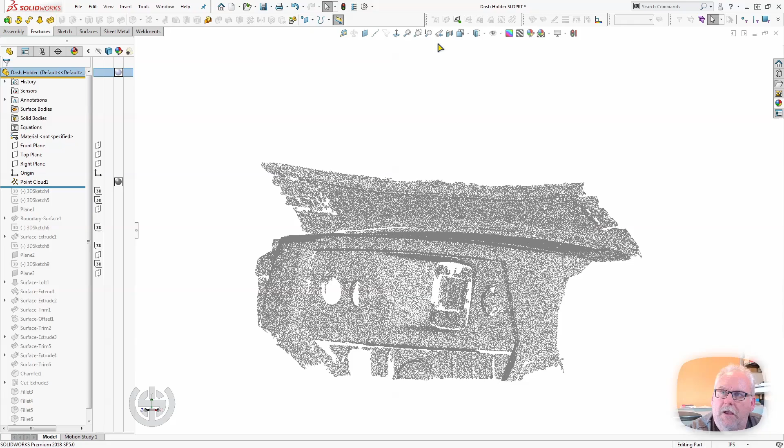And so what we have here is we have an aligned point cloud, and like I said, I did that in Cloud Compare. I'll show you the front view.

So that's essentially the front. I actually think I aligned it to this corner and this corner over here, and I think the crown is somewhere right in here.

If I go to a side view, you'll be able to see that the windshield is skewed slightly. I didn't mean for that. So this right here should look more like, let's see, can I get it? Should look more like that.

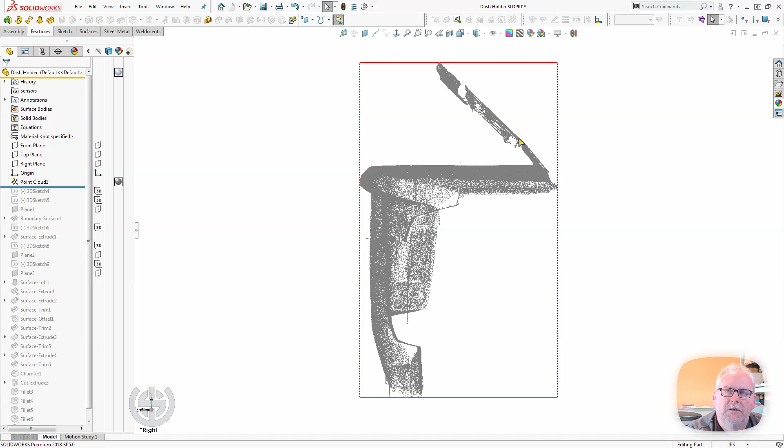So this part right here should literally be, since it's a scanned face, should be like one line thick.

If you've ever used alignment software, it kind of sucks. I think, I don't know why I think this, but I think that I'd have to go back and do some research.

I think that Fusion 360 is what a lot of people use. I don't know what the best way to align a scan is to an XY coordinate system.

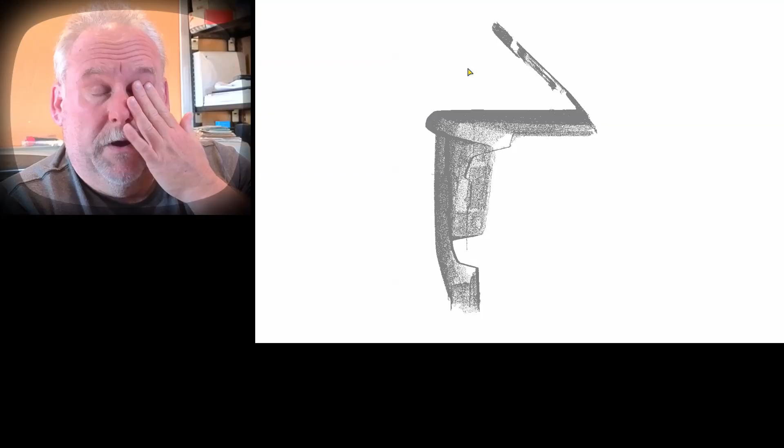There are a number of probably very robust packages like Geomagic, or there's some other ones that aren't coming to mind right now, Geomagic Design X, and that may do a better job of aligning. So normally what I would use is a 3-2-1 alignment, or I would align it by 3 points.

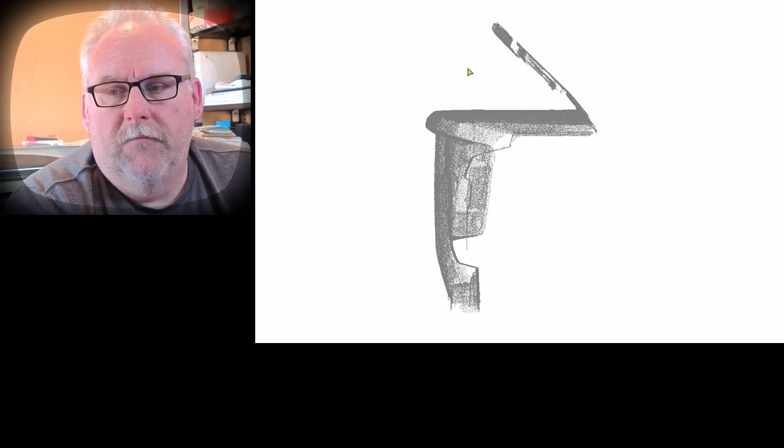So this isn't perfect, but if I go back to the side view, not the front view. We'll go back to the side view. You can see that this essentially is straight across right here. And we'll look at the sketches here.

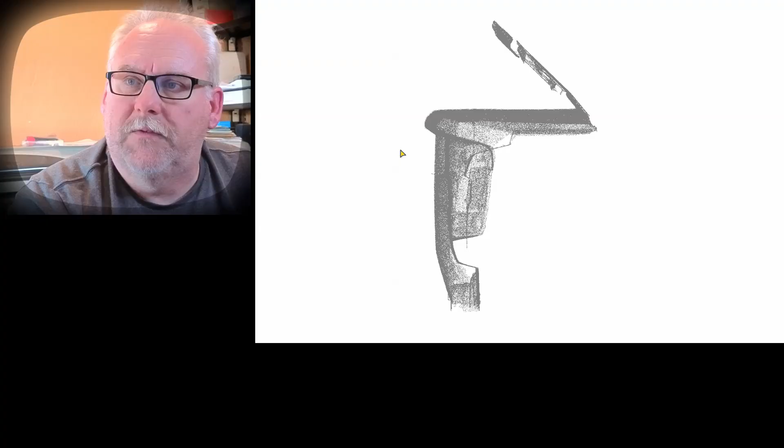So in SolidWorks, if you've got professional, you can get this thing. Let's see, do I have it turned on? Add-ins. Scan to 3D. I'm not going to go into it, but essentially what you can do is insert it. Where is Scan to 3D at? Tools. Scan to 3D. You can do a curve wizard.

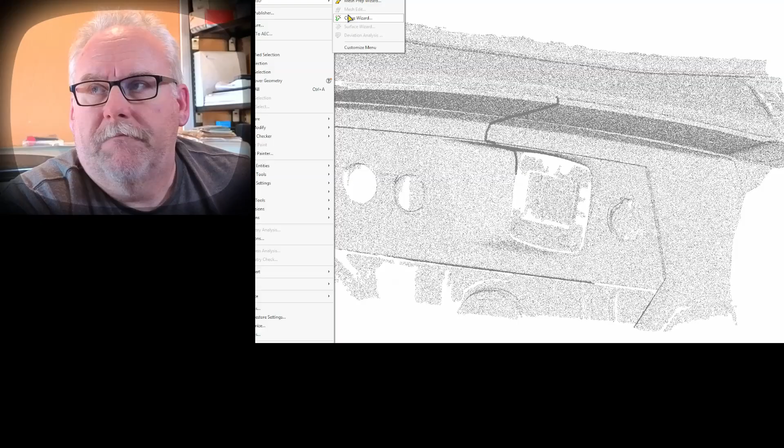I could have also done a surfacing wizard, I found out later, but I just used the curve wizard, which generates these splines. So this is actually a generated spline right here. When you do the scan to 3D, you can use a plane as a sectioning tool, and it'll fit a spline to the... excuse me, I ate sardines.

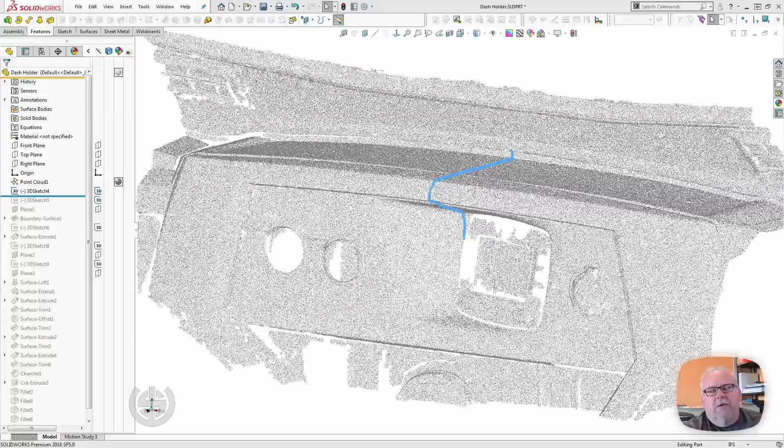It'll fit the spline to your point cloud, and basically you can give it a tolerance of how many points away from the median or the midline that it references. So I always set mine down around 0.01, so 10 thousandths. Is that right? 10, 100,000. Yeah, 10 thousandths wide. And I think what it does is it takes all the points within 10 thousandths and projects them into the plane that crosses. At least that's what I imagine it does.

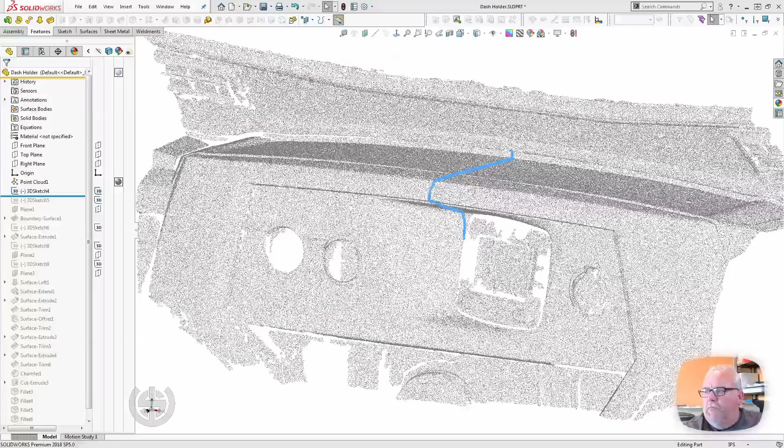So I tried to put one right at the crown, and this is an actual spline that's been pushed into a 3D sketch. And then you can see this one here is also a sketch across the top edge of that face. And you can see right in here there's some type of feature that dips back up. I'm more or less trying to create near surfaces, right?

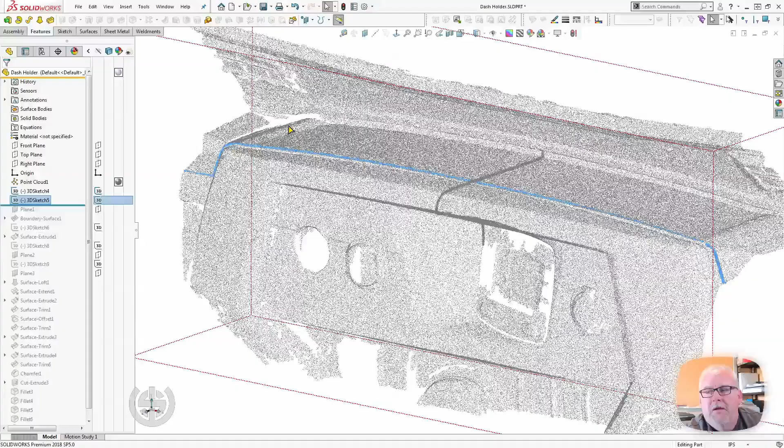Again, this isn't Geomagic Design X. I'm not going to get an actual surface. Now, I did find out later I could have generated surfaces. So there's a couple of caveats here.

If you're doing this, when you create a sketch, the first sketch you create that you put dimensions in, when you put your first dimension in and it scales, you undo that. So let's say you go to dimension something and it says it's, I'm going to say it's 15.5623, right? It's just over 15 and a half. And let's say you want to constrain whatever it is down to 15. It will scale the whole thing.

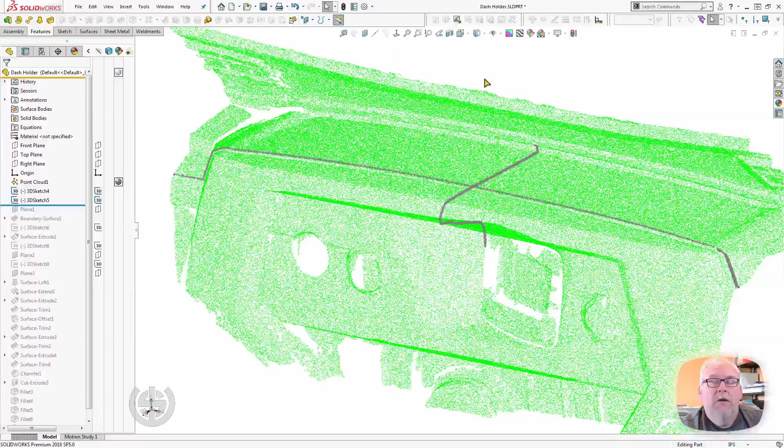And I believe it scales the point cloud as well. So what you would do is you'd undo that - you'd Control Z right after that happens. And then I believe you can edit that dimension without it scaling.

And there's some other things that you can do that will move your point cloud down the feature tree, and you want the point cloud to stay at the top. So I don't know what causes that behavior, I forget what I did. I did something, interacted with the point cloud, and SolidWorks moved it to the bottom of the tree. So we're going to move on. I'm sorry that was so long.

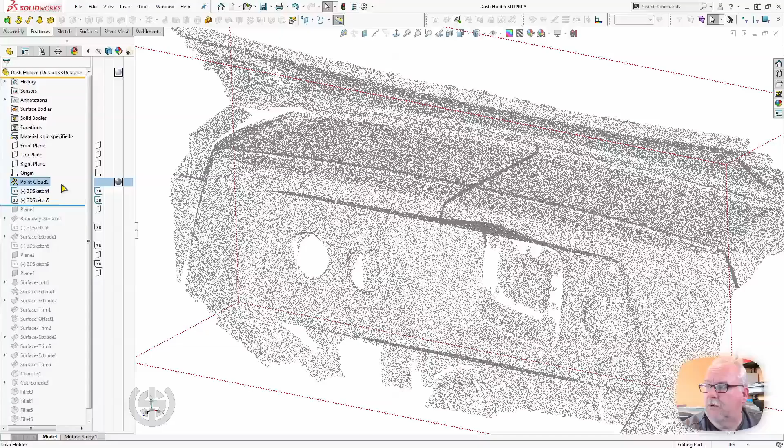So then I generated a plane, and the plane was right on top of that sketch. Did I even need that? That plane may not be used. It says it is - okay, so I generated a boundary surface.

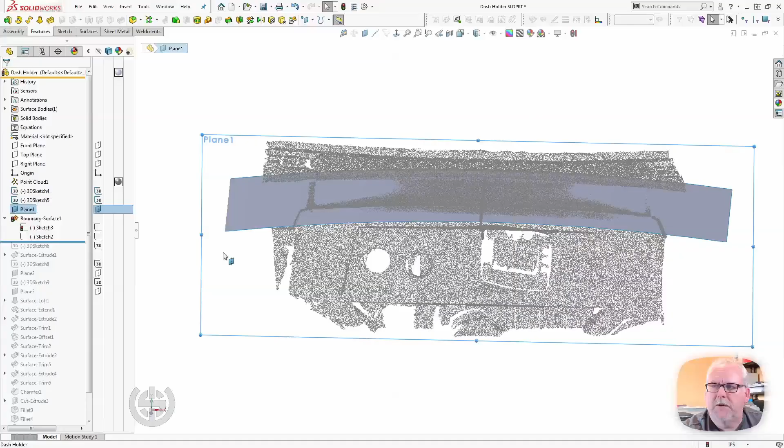All right, so you can see right here where it's not quite matching, so my surface is high. I generated a boundary surface. So what I did - this is a straight line that intersects. In fact, I'm going to turn the point cloud off.

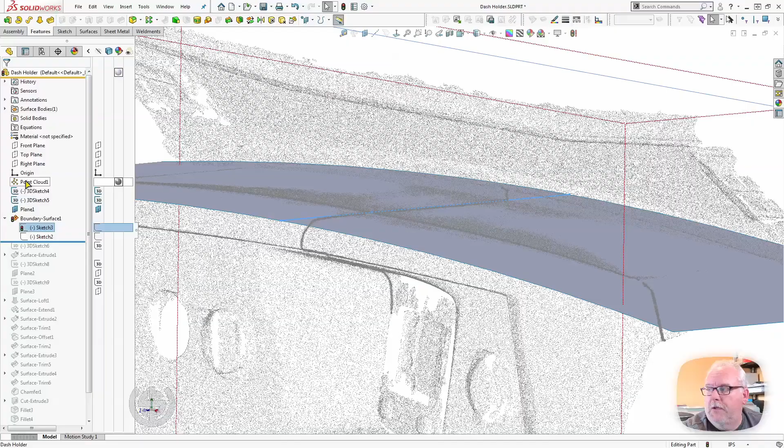By the way, you can only turn the point cloud off - notice how there's no way over here to do it. Nothing to click, right? So the only way you can turn the point cloud off is to hide it in the right-click menu. So again, I would consider that a flaw. Probably has something to do with 2018. With the way SolidWorks is slow about things, I'd be shocked if it was fixed in 2025, but maybe it is.

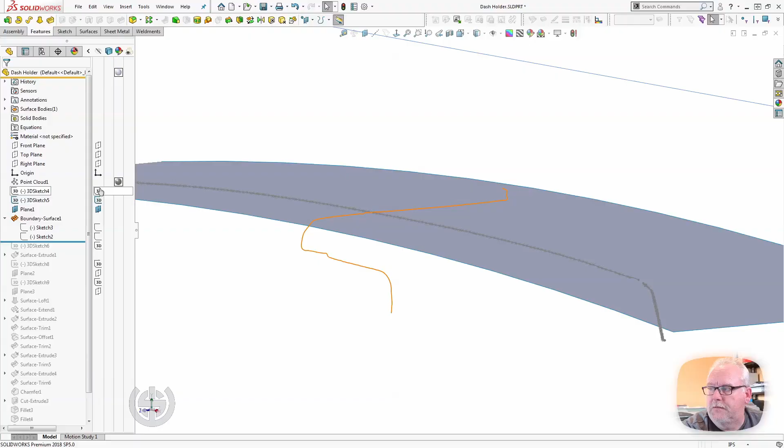So we're going to actually turn off these two 3D generated sketches from the cross section, and we're going to have a look at what actually generated this surface. So that's literally a straight line, and this is a curve. And so it generated this face, right? It's a symmetric face across this line here.

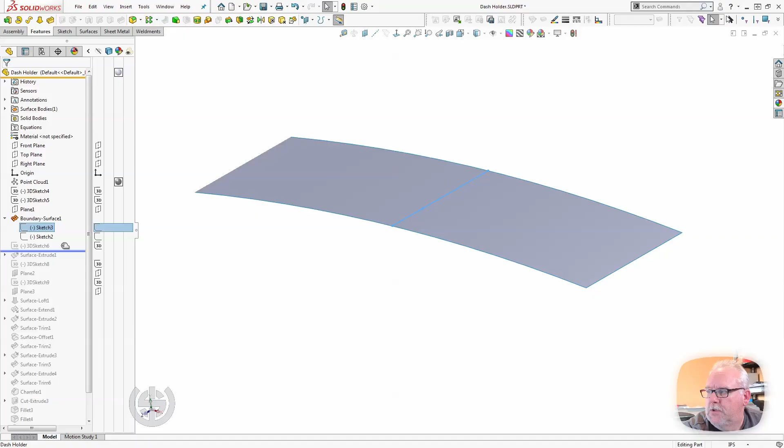I probably could have lofted it - there's a couple of ways I could have done it. I chose boundary surface. So then I'm going to turn the point cloud back on so you can see what I'm doing. So you can see the surface is high here, but I'm generating something that's going to be using double-sided tape, so I have a certain amount of thickness that I can sort of fudge factor.

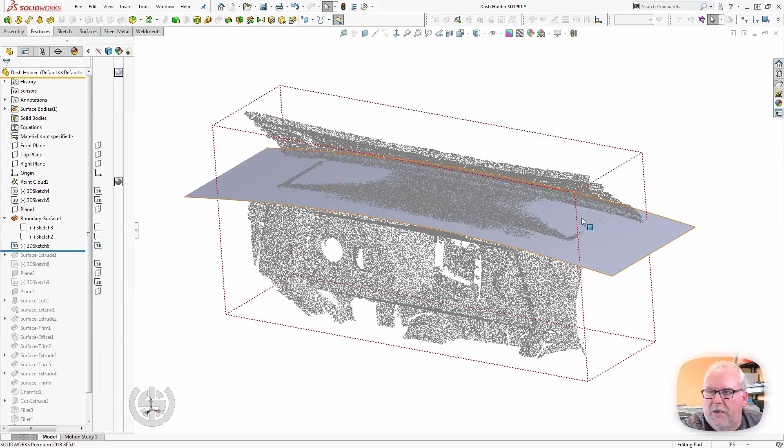Because it turns out the windshield is not actually the face of the dash.

I'm not used to doing this. So the face of the dash, actually I can point to the video here. That makes more sense for you guys.

The face of the dash isn't planar to the windshield. The windshield actually runs off that way, with this side over here being further away compared to this face across here. I only found that out at the end.

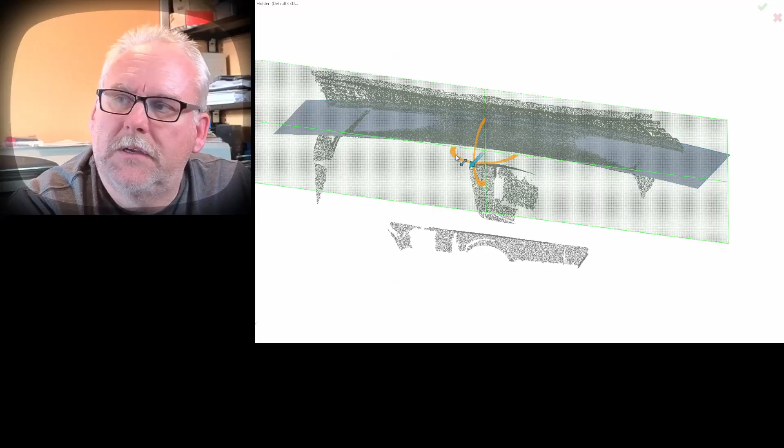Can I show you guys? I'll try to show you. Let's see, does that work on the... Oh, it actually does. Okay, good deal. I'm glad that works. Escape.

Let's get back to that. So there's my first surface. This surface here would be for the windshield. This is the one, you can actually see it right there. I just generated another line off this 3D sketch right here.

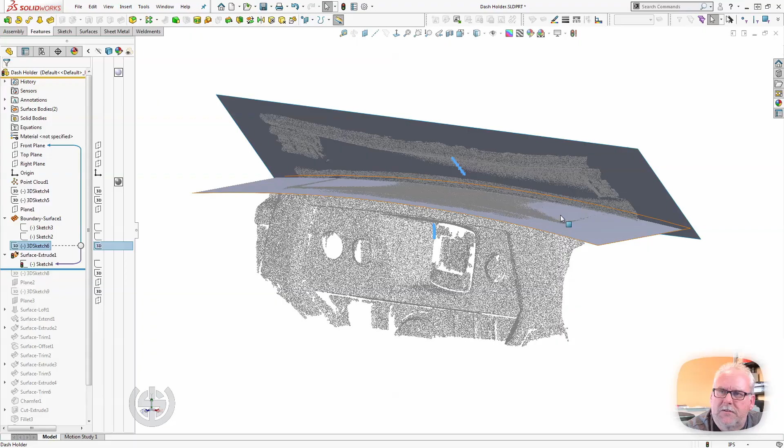So this sketch came from the scan data. What you can see in this image, in all reality where this comes from, see how this surface is out towards us.

This area right here is towards the screen. This area over here is actually on that side of the windshield.

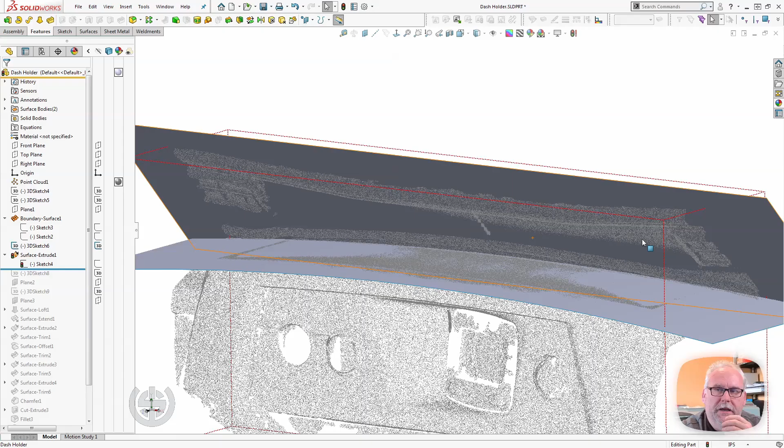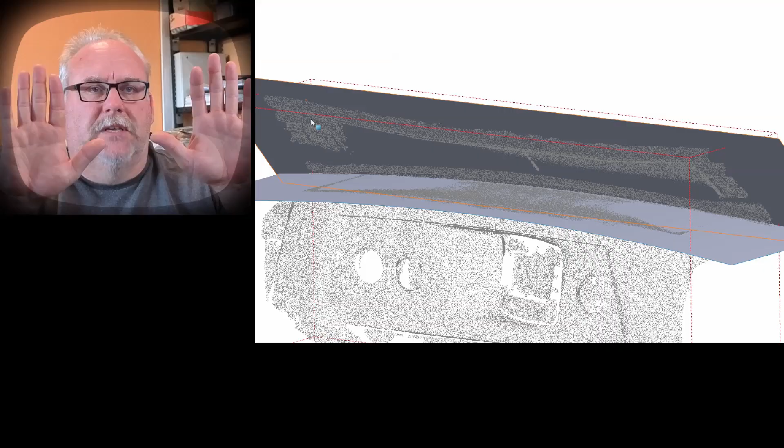The scan itself is tilted away like this. So if you watch my cursor, this area here is actually away, meaning I have the scan tilted slightly one direction. I wasn't able to get it perfectly lined up.

And that's what I don't like. I wish there was some alignment software where you could pick a face, align it in one direction, and then lock that axis. You can kind of do that in Cloud Compare, but I'm not an expert in Cloud Compare, so that's part of the problem here, but we'll get back to this.

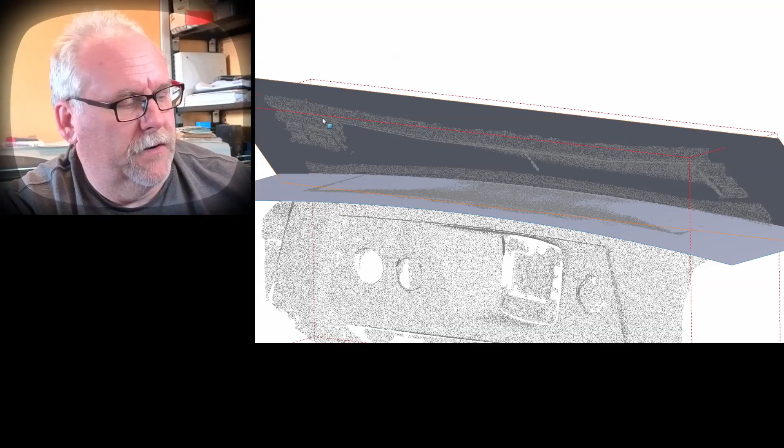So windshield, right? Two surfaces. These are all going to be to construct that front face there. You'll see here in just a second. So you can see these two sketches here.

And if I look at it from this direction, you can see that it's curved right here. This has got a significant amount of curve across this face.

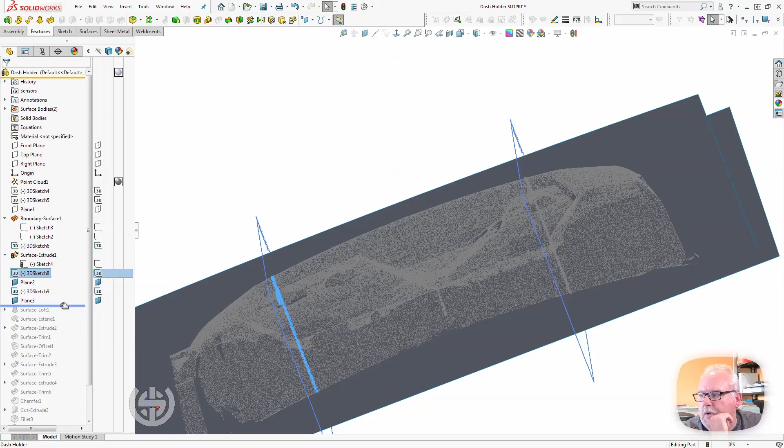So, did I combine? Is one of these combined? Sketch 7. Where did 5 come from? So sketch 5 in the middle there is generated from 3D sketch number 4 up here. So that's my midpoint.

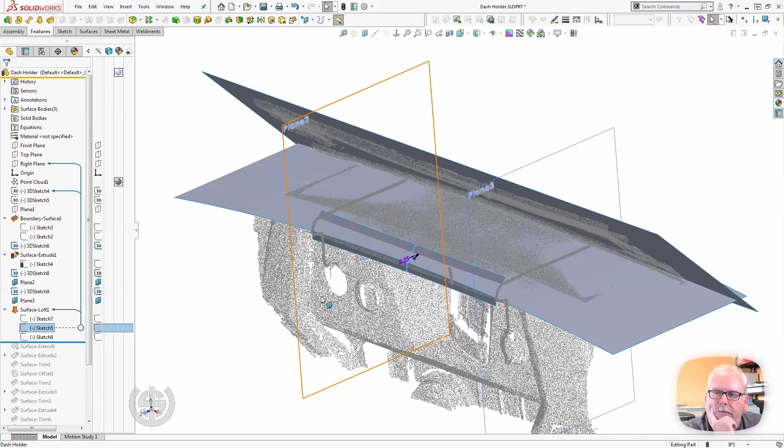The dash doesn't have symmetry. That face there is actually canted, I believe. I'm pretty sure it is. I don't think it has real symmetry across this point right here.

So let's get back to it. Surface loft, and then I wanted to get this loft out to the edge here so it would cut well, so I surface extended it right through the ends there. You can see we have 3 surfaces so far: kind of the front edge of the dash, top, and then windshield, which is a plane.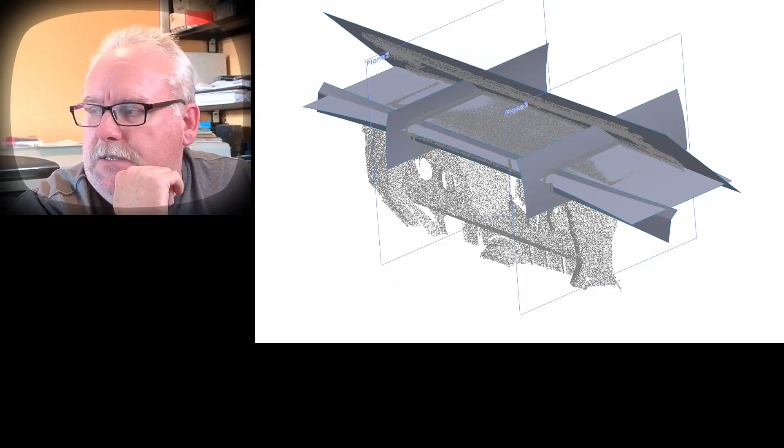So let's see, what else do we got here? Then I generated some sides. These literally were artwork. So if I go into the sketch itself and we have a look at it, let's get you guys back here. So you can see that this is just an arc.

It has a 10-inch radius, and I just generated some numbers to get the sides. So if this is my origin, it's 2 inches up, 4 inches down. So I would call this arc, and it's 6.5 inches here and 6 here.

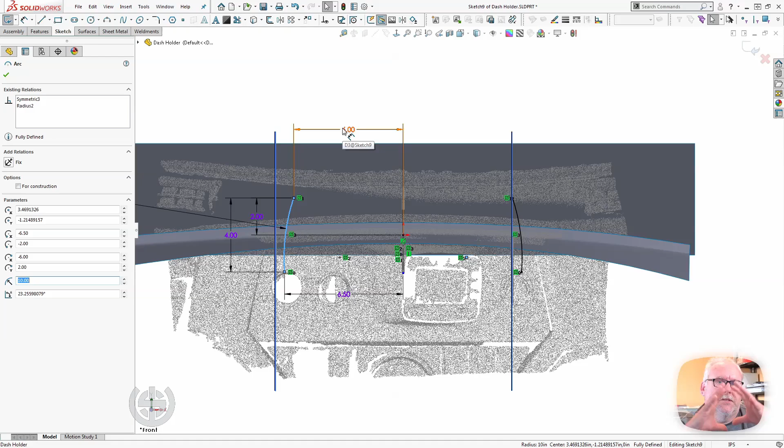So in this particular case, this is just a way to get these kind of Darth Vader edges that encapsulate the surfaces. So we'll go ahead and exit out of there. You can see those surfaces go through both sides, through all the surfaces. And if you're not used to working with surfaces, this is going to sound like gobbledygook to you somewhat.

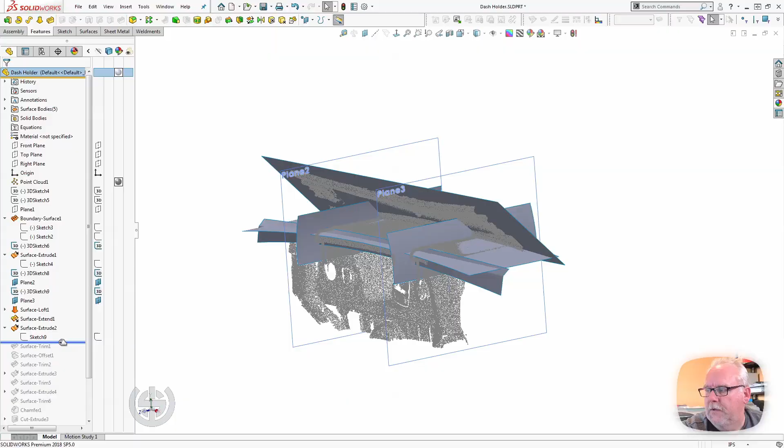So then I did a surface trim, and I trimmed off everything. Why is it not showing? What's going on here? In fact, I'm going to get rid of the point cloud at this point.

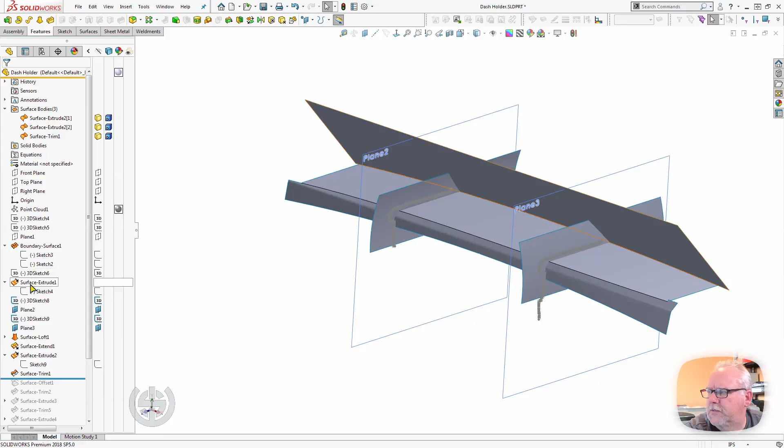And we're going to get rid of that. And we're going to get rid of, what else is showing? This, and that. Okay, so the first trim, let's undo it.

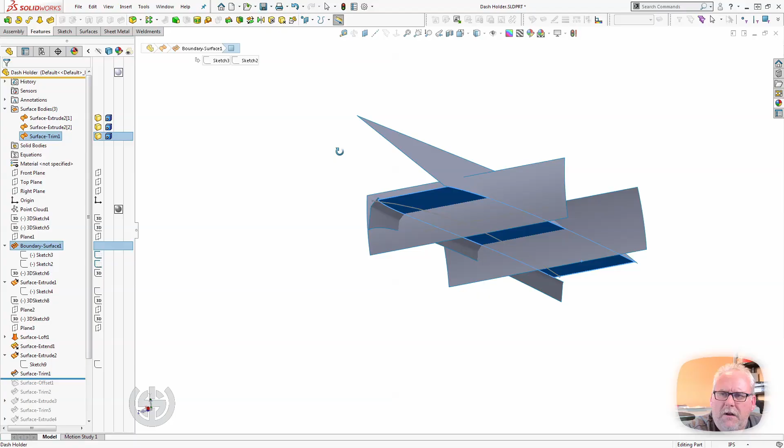You can see I just trimmed these two together. So this surface and this surface are now joined. And there's all this overhanging geometry that you can just ignore, like this piece here. But the next offset, so the reason for the offset, so you can see what I did here. Let's get it so you guys can see it carefully.

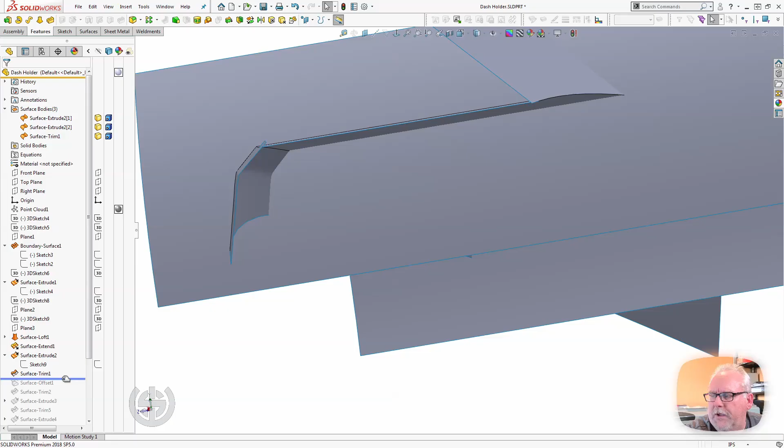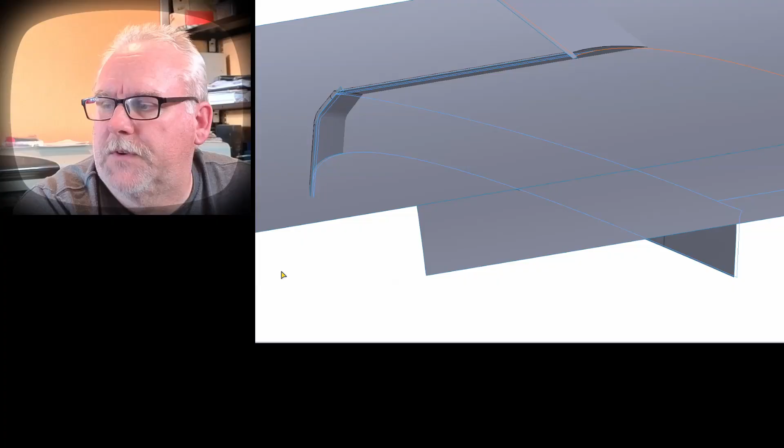The reason I did that offset, I'm going outward. Think of it like clearance between the dash where the double-sided tape's going to go. So surface offset for the tape. And then I'm going to actually hide this inner surface because I don't need it anymore. I'm just disregarding it. There's all this extra patchwork here that I don't care about. It's going to go away and get trimmed.

So my next trim trims off everything inside the two Darth Vader wings. And these basically are acting as trim. And I trim now this surface, so all three of these surfaces are joined together by the trim function. Then I'm going to extrude something. What am I extruding here?

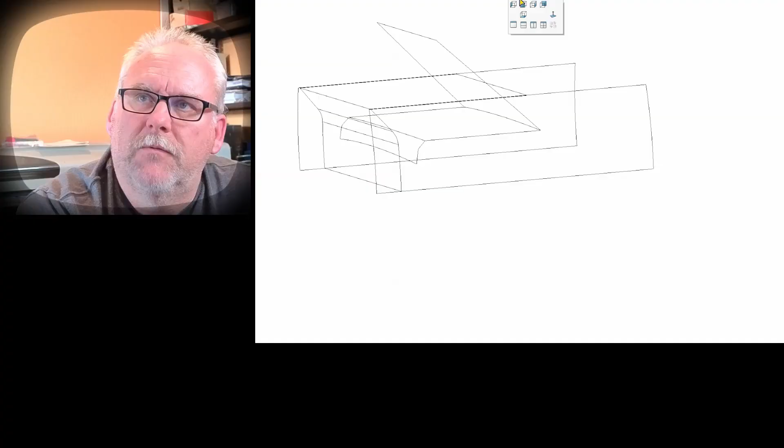Okay, so with this extrude I'm starting to now form, we'll go into a see-through view here, and we'll go to a right side view. So this surface extrude here, surface extrude 3, is forming the top of my tray. So if we have a look at the sketch, all this is meant to do is make the top edge of the tray. You can kind of see what it formed.

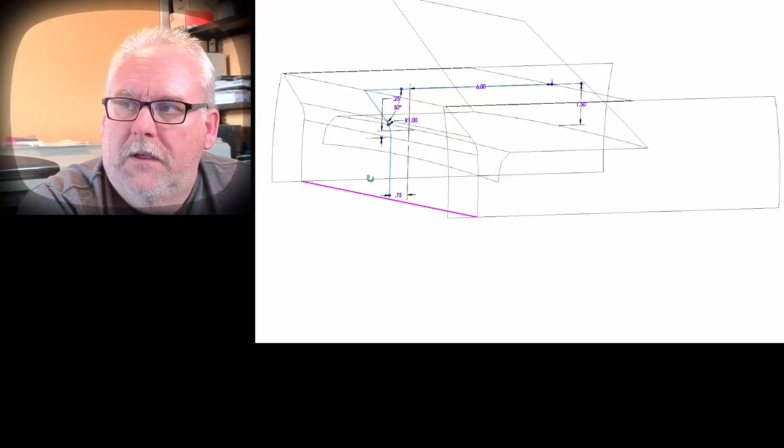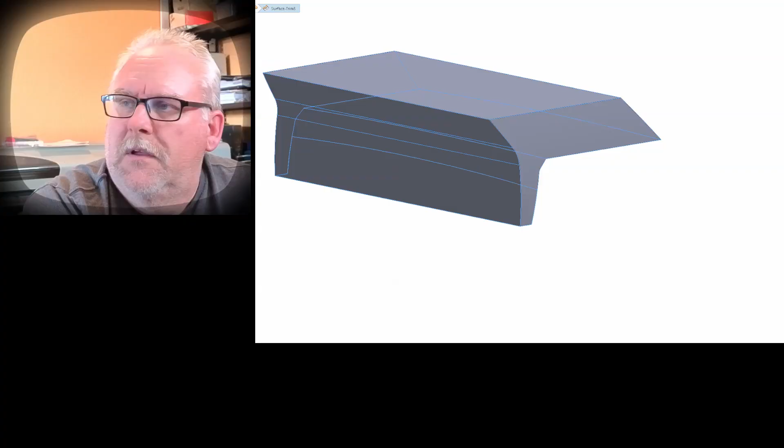So we'll go back to this view, and you can see that I basically just put a front. This is a separate surface that's on the front here now. So in this trim operation, I trimmed everything out. If we have a look at what I trimmed, all the stuff that's transparent is what I trimmed. So I did a mutual trim. This is all my surfaces that were included in the trim command, and then these are all the pieces that were trimmed out.

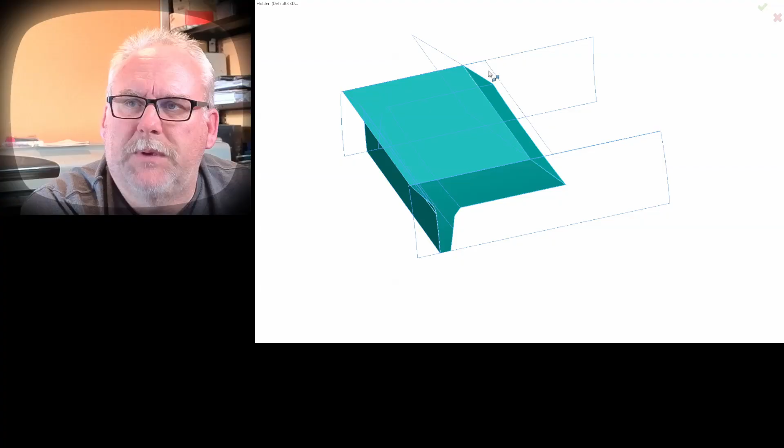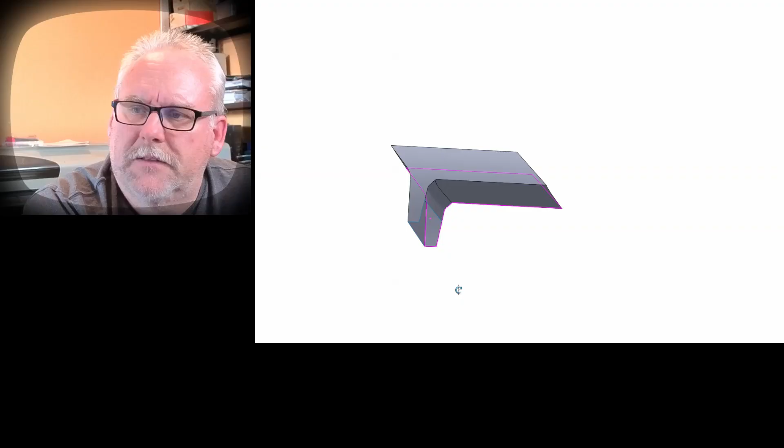That one and these two back pieces and this piece right here and these little wings up front. Did I get a solid out of this? I can't remember. Let's see, nope, I've still got two surfaces. That's because I've still got an open bottom right here. So you can see that that's open. So I have a mostly watertight model, but not a complete watertight model just yet.

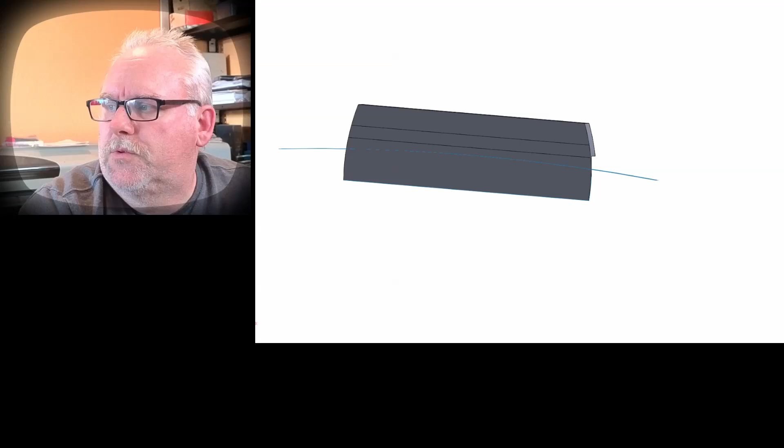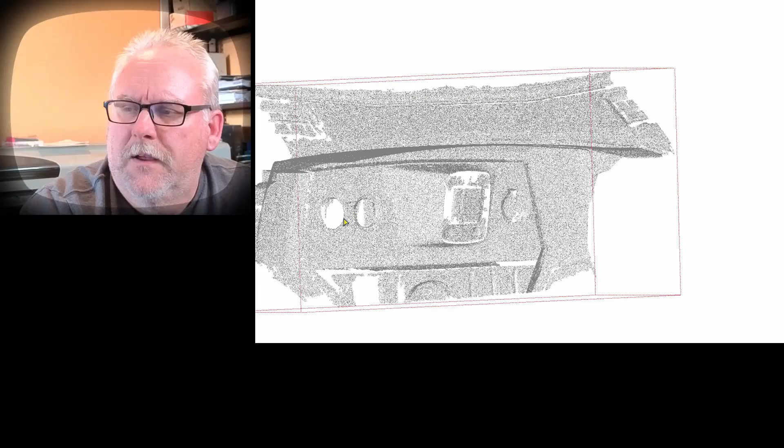So then I did a surface extrude, which was just an arc across the bottom here, and coincidentally, it matches up. It's hard to see it, but let me actually turn these off for a second. So you can see this shelf right here, this indent. The radio right here, some charging buttons, and it's inset. So I made the trim right across the middle of this face right here.

So we'll turn these two back on, and we'll hide the point cloud. And then I'm going to use one more trim, and I think I'm getting a solid out of this. I am. So we now have a solid body. This body can be ignored. In fact, that should be deleted. So on this surface trim, there was an option to create a solid right here. Sorry, guys. I should have had this open.

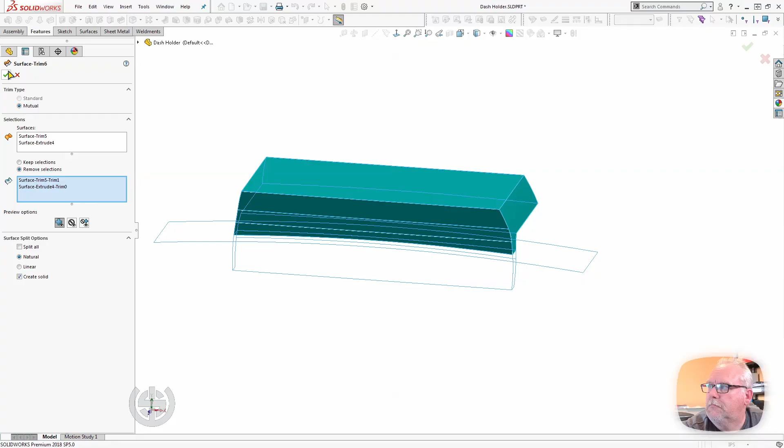So you can see right here, create a solid is here, and that's what I did. This was just to trim off that face along that edge that I was hopefully showing you guys. Gosh, it's hard to remember to switch back and forth between the different views when you don't do this a lot. So then there's a chamfer right here.

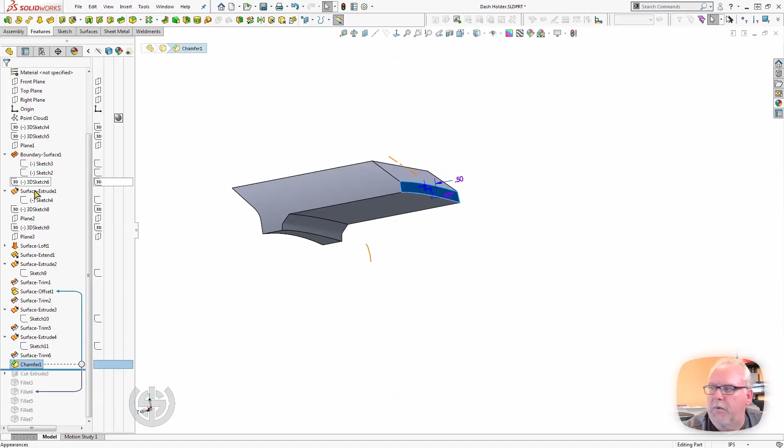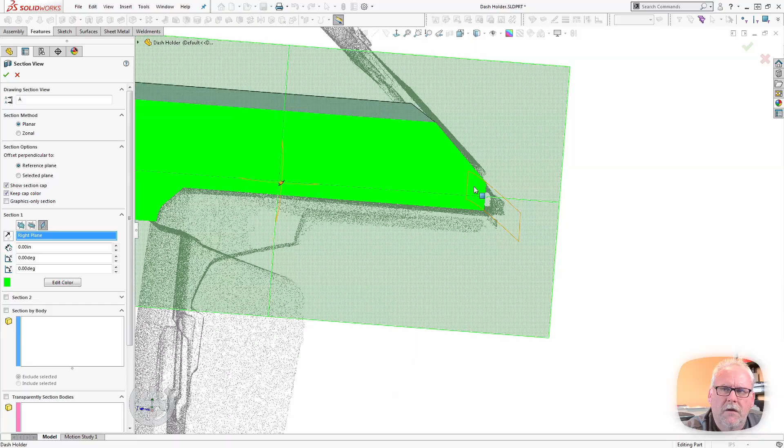The reason for the chamfer is that it clears the rubber on the windshield. Again, we're going to turn the point cloud back on. And if I section this, you can actually see that right there it barely is going to touch the rubber. But if I roll this back, the idea is that chamfer is meant to clear the windshield rubber, and this little bump out right here is the rubber protector that goes around the windshield.

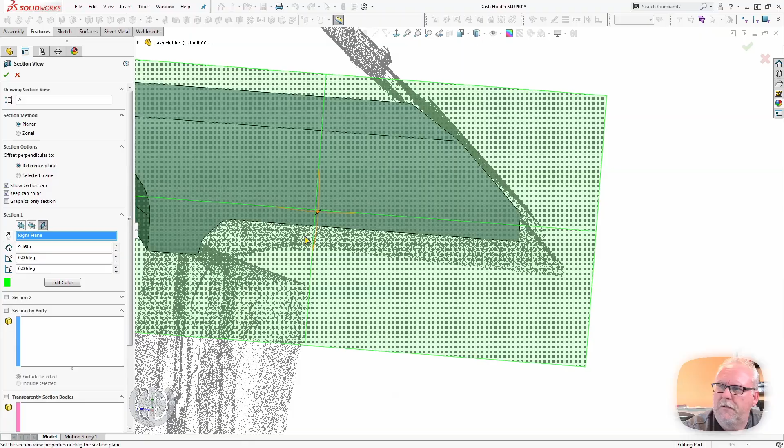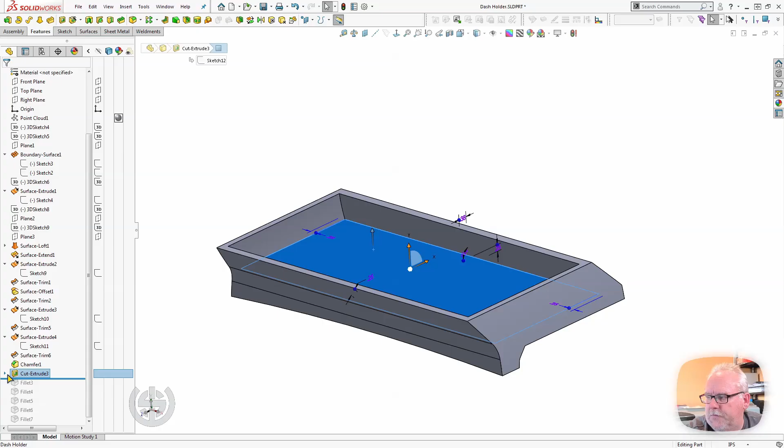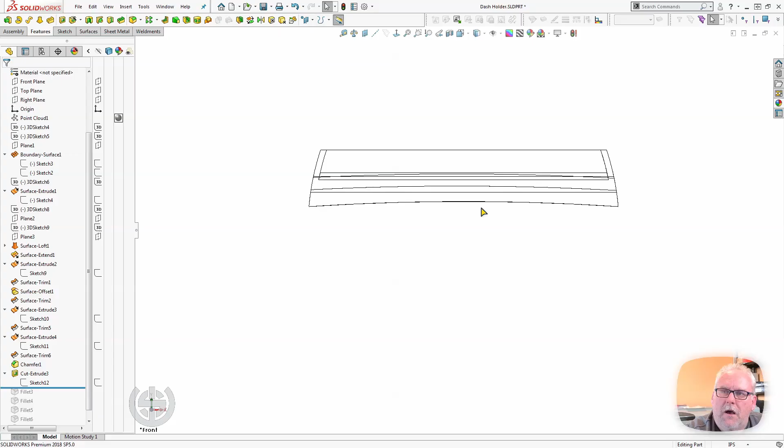We're going to turn off the point cloud again. At this point we have this solid, so we can start treating it like a solid, something you're probably all familiar with. So I did a cut extrude here from the top view, so I'd get consistent wall thickness. We'll actually have a look at it from the side. It's thicker down here and thinner up here, but on the front here it's consistent wall thickness. And then if I go from the front view, how would I show that to you guys here?

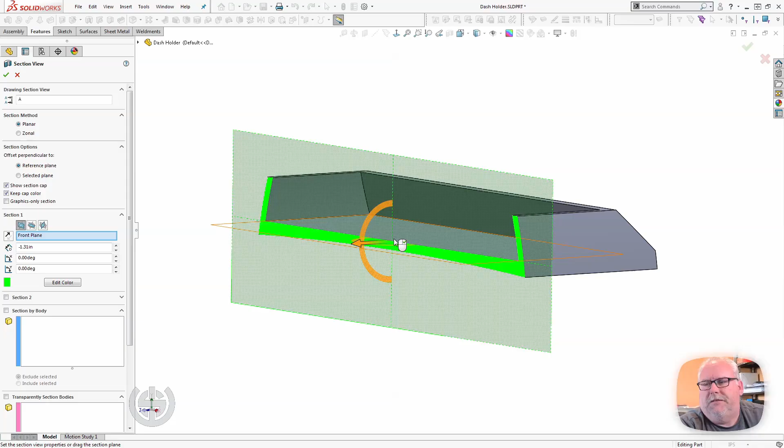You can see when I get back here, I have a thin point right here. So my thinnest point is 1/4 inch. And I believe the walls are 1/4 too, or maybe it's 3/8. You know, this is all 3D printed plastic, so I don't know if this is going to hold up or not, but I figured it was worth talking about because some of you might want something like this.

And then obviously you do all your filleting, if you can help it, at the last. So I filleted the inner pocket, inner wall. What did I do next? I filleted the sides. Order matters on these fillets, or they'll roll around. Like at one point I had filleting rolling around down here, and that would have undercut where it touches the dash. You want it to have a square sharp edge, so there's no undercut at the dash. So filleted these two faces here and filleted this back edge here.

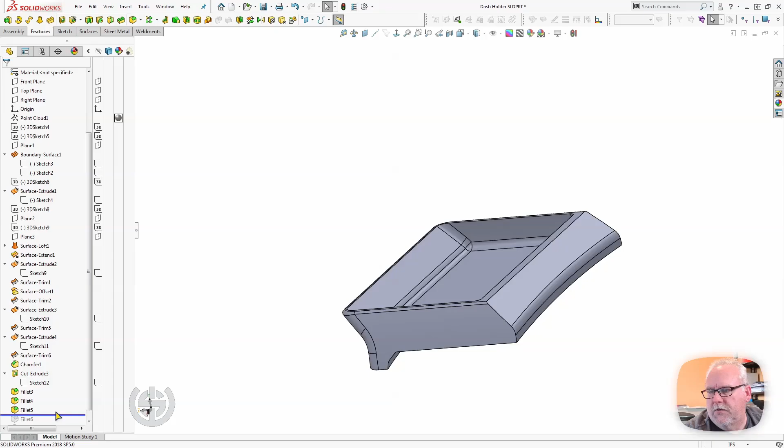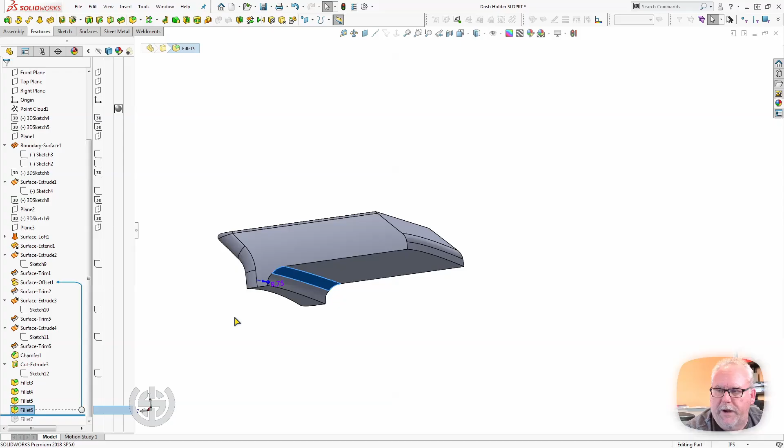And then let's see what I do after that. What's that fillet? I think that fillet runs around the top, but it doesn't. I didn't fillet it back here where it's close to the windshield. So let's see. Yep. So filleted that edge. And then what's one of my last features? What's this fillet? Oh, this fillet is where the breakover for the dash is right there underneath. And then what's fillet 7? Fillet 7 is to soften that front edge.

So one of the things I thought about doing is making this stick out a little more. What I thought about doing was making a pocket right here. And the reason for that is you'd be able to have maybe weep holes that came out the corners. So for water, you'd have water shedding or dripping here. I also imagined that you might be able to stand a phone up if you made this tall enough. You might be able to stand the phone up vertically, so your phone would be like this.

I don't actually think that, you guys like my mouse skills there, I don't think that's going to work. I don't think it would stand up vertically.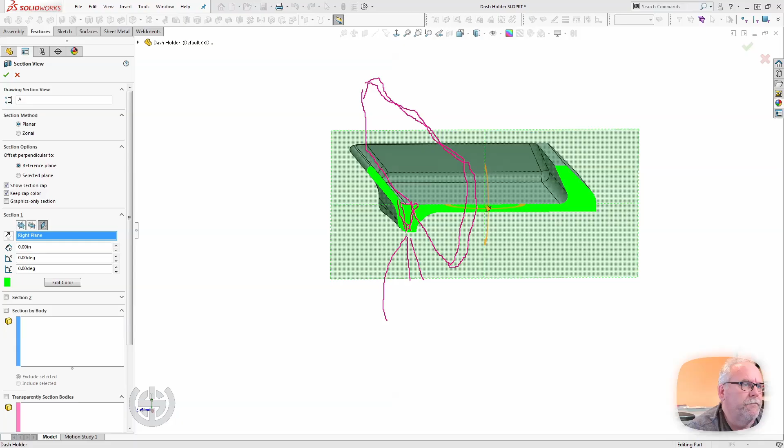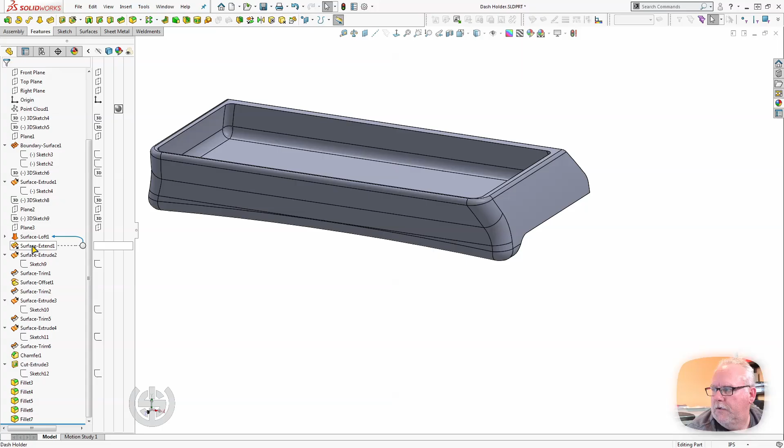So this might be helpful to tell you how wide this is. So I'm pretty sure this is 12 inches wide. Let's see. Right. Where is it? 6. Yeah, so 6 inches to center. So this thing is 12 inches wide total. Let's see, back to 6. So this is what I have right now.

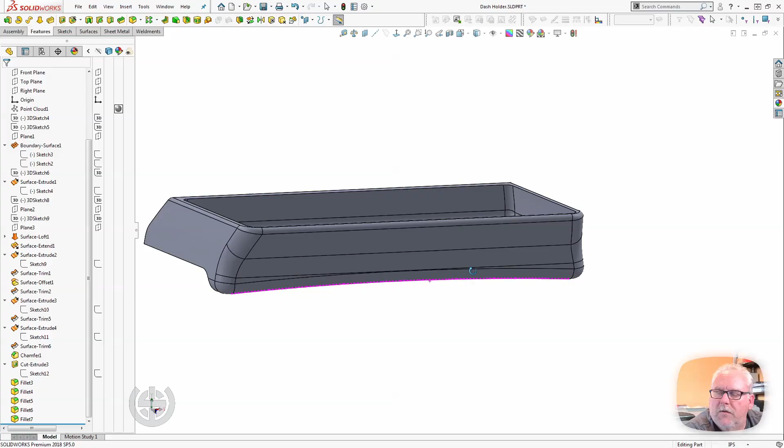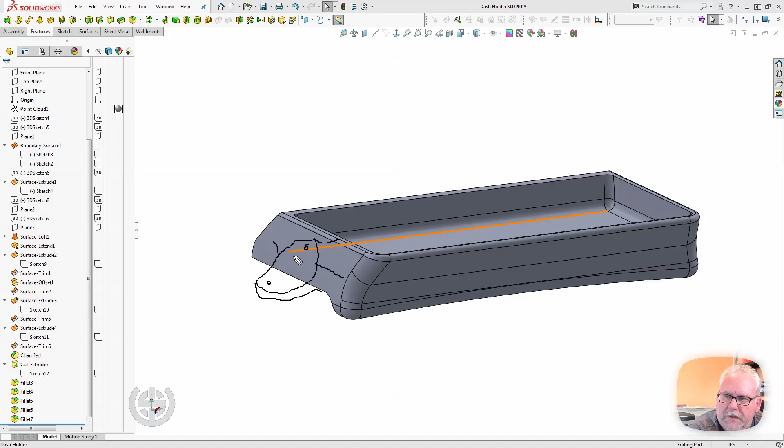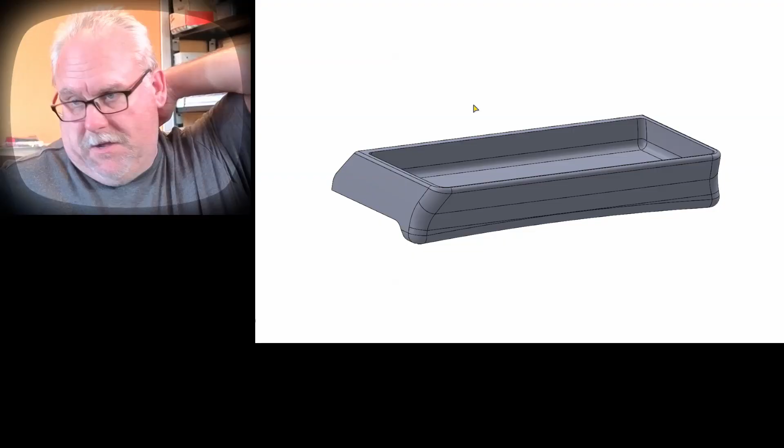I'm thinking about adding, sort of on this side over here, this was for that X mount, some type of surface that goes like this. You know, something that comes off in this area. And the reason for that, man, I suck at this, the reason for that is that he wants to mount his iPad mini on this thing. So it's probably going to get some more development. I think I'll probably print a first one, even though it's going to take a bunch of filament, just to see how well this thing works.

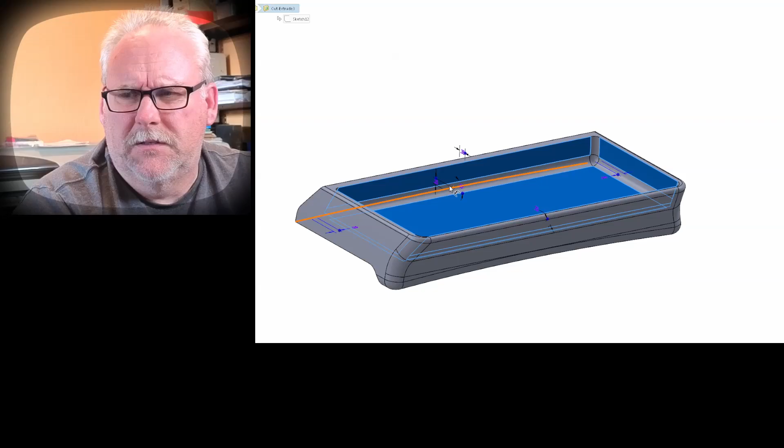This is, here we go. So this top face here is 1.5 inches, and then the cut extrude is 1/4 inch deep. So I think that's 1.25 inches. Let's check. From here to here is 1.25 inches.

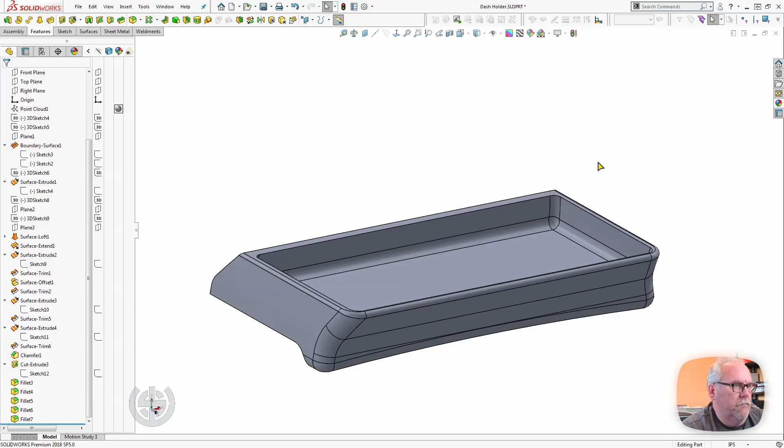So, I'm sorry I suck at this. I'm not a very good OBSer.

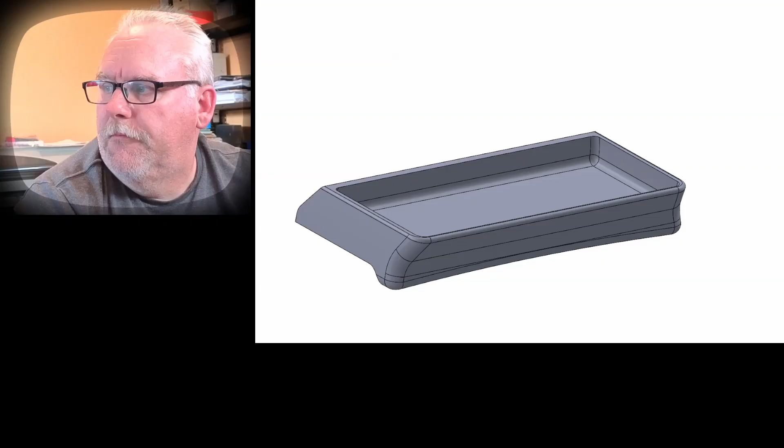But this sort of concludes the shelf. Actually, what I'll do real quick, we'll go back to here and we'll take a look at this with the point cloud on. So you can see how it fits the dash. Pretty simple. The dash steps down right in this area, so it's going to have more space there.

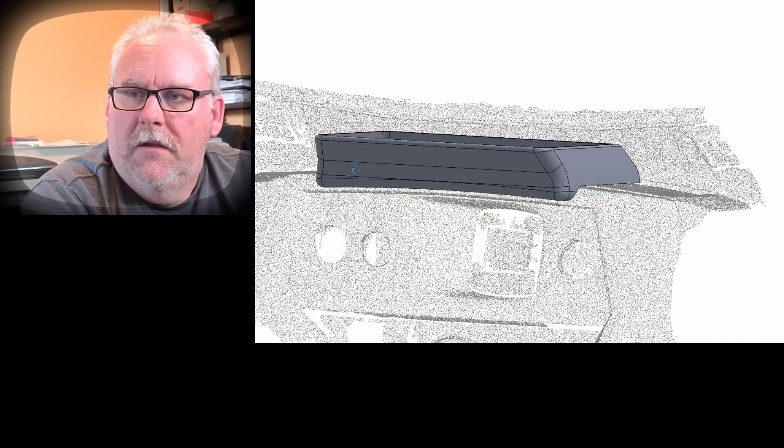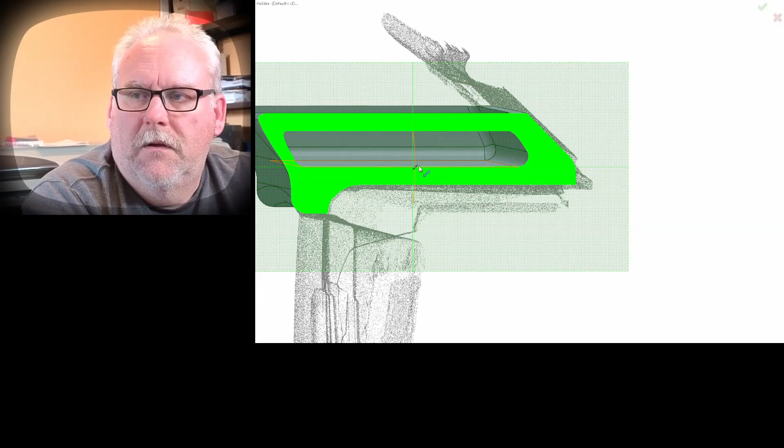If we do a section real quick and look at this thing from the side, and we'll start over here. And we'll go with a direct side view. You can see it doesn't perfectly match. I have to tilt it a little bit. It doesn't perfectly match the point cloud. Obviously, I could have spent more time aligning the point cloud. Anyways, you can kind of see how close it follows the top of the dash. It's pretty close. It's gonna work.

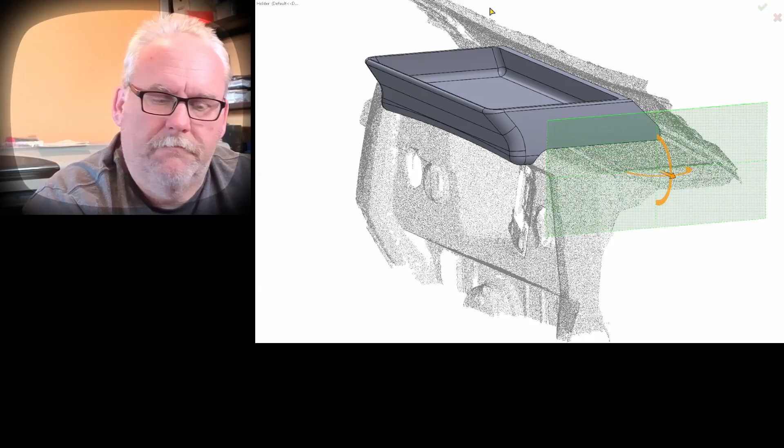So it's not super pretty. It's real basic. I'm not an industrial designer. I could have made it a lot swoopier if I would have spent more time on it, but I haven't quite figured out what I want to do with it yet. I know I gotta have drain holes because water does get inside the cab area when we're driving around in the rain. I think there might be a case for some robust hooks on the front for possibly keychains or walkie-talkies.

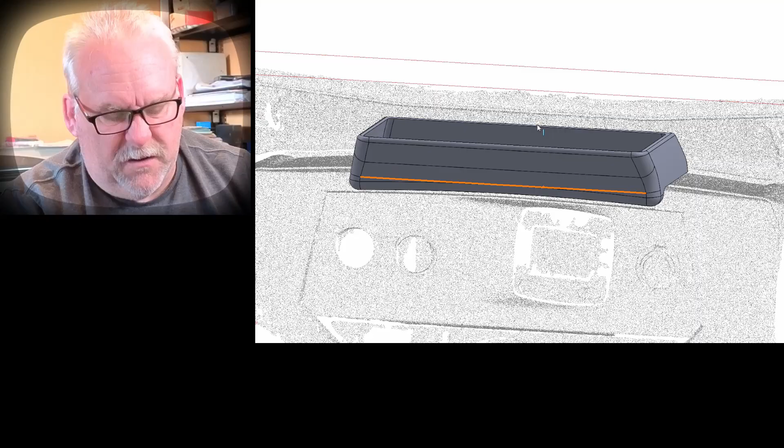So anyways, that concludes the show, folks. So hope you learned something. I hope this helps somebody out there. 3D scanning, especially when you don't have any flat surfaces to reference, is new to me and kind of a pain in the butt. So that's how I did it on this one. We'll see how I do it on the next one.